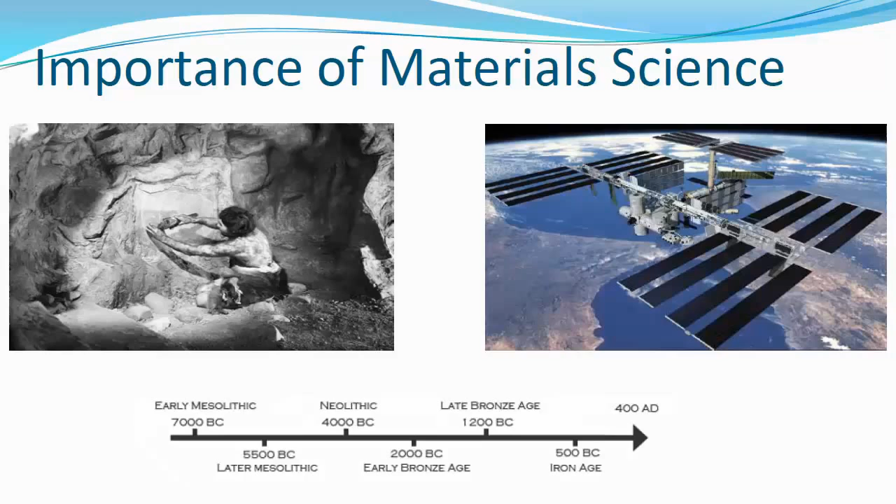Materials science is an immensely important human endeavor, so much so that the development of our civilization has been measured in terms of the mastery of our materials, from the Stone Age to the Bronze Age to the Iron Age. Our mastery of materials has brought forth the modern world, and innovations in materials often enable technological advances.

Such developments in materials affect us in many ways, and I think one of the most exciting ways is the way in which mastery of materials can enhance people's lives. And here we have an example of the use of various high technology materials such as metals and alloys, polymers, to produce a lifelike prosthetic arm.

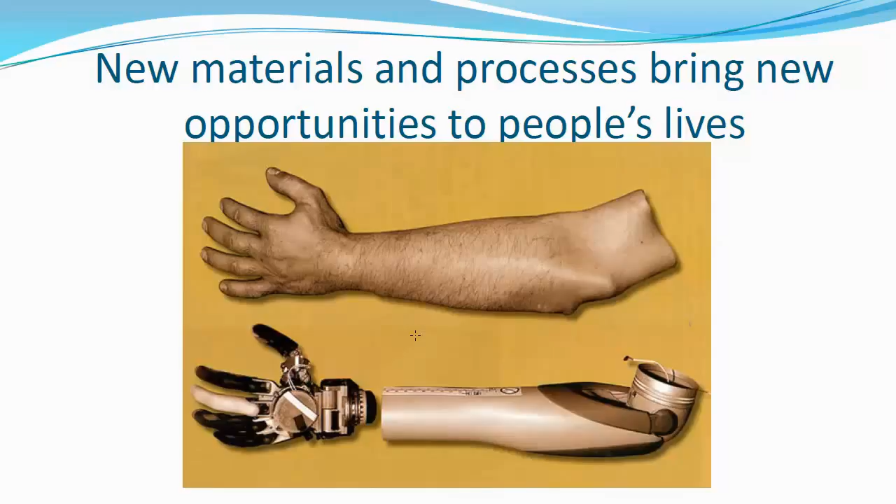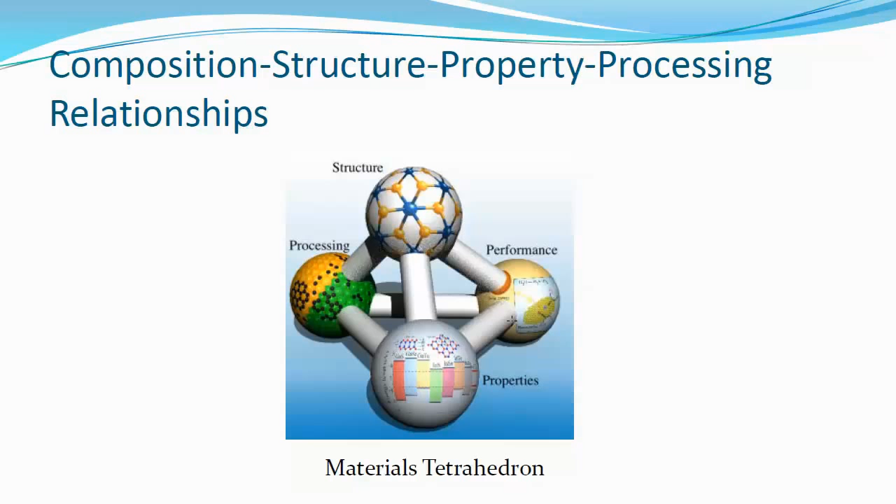A common theme in materials is the interplay between the composition of a material and its structure, how that relates to how it must be processed, which gives rise to particular properties which relates to the performance of the material in a particular application. And all these things are interrelated.

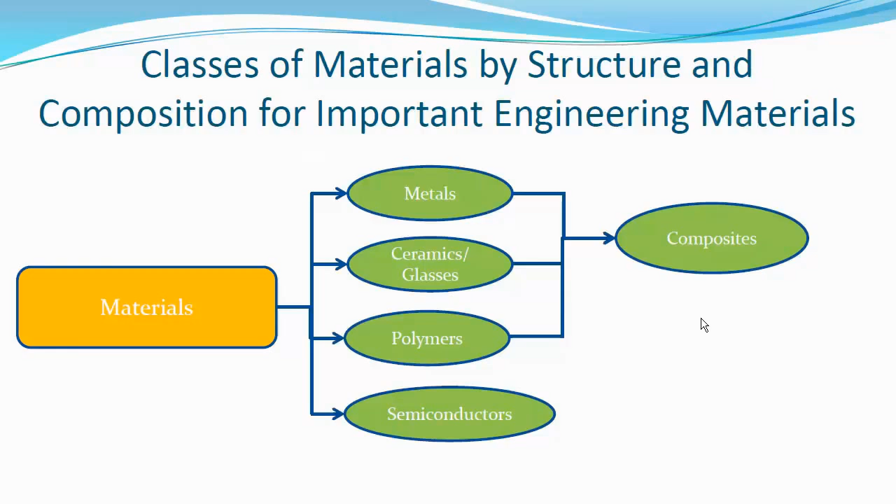Materials may be classified according to their composition and structure. If we do that, we can see that there are 5 important classes of materials. There are metals, ceramics and glasses, polymers, semiconductors, and if we combine some of the aforementioned groups, we can get composite materials. Let's have a look at each in some detail.

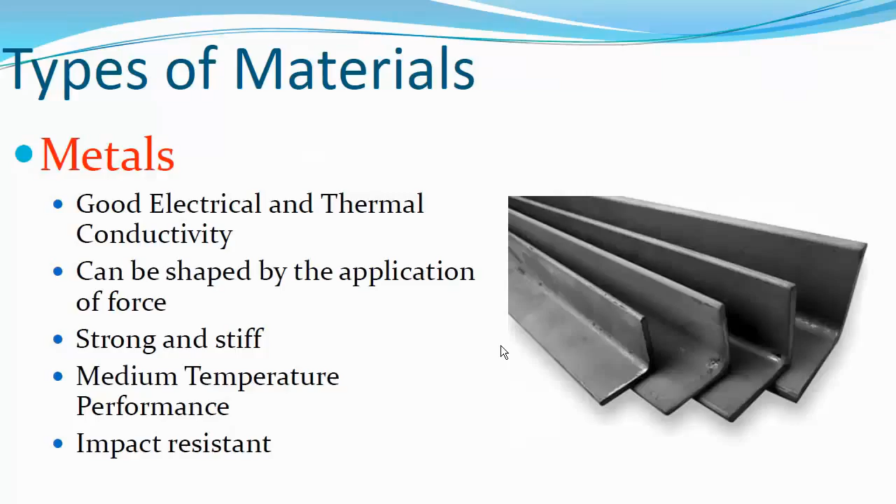Metals. Metals are characterized by good electrical and thermal conductivity. They can be shaped by the application of force. They are strong and stiff. They have medium temperature performance and are impact resistant.

Ceramics, glasses and glass ceramics are formed from inorganic compounds. Ceramics have a crystalline structure, whereas glasses have what is known as an amorphous structure, where the atoms are randomly orientated. Ceramics and glasses generally do not conduct electricity, and some of the best insulators are ceramic and glass materials. They are strong and hard,

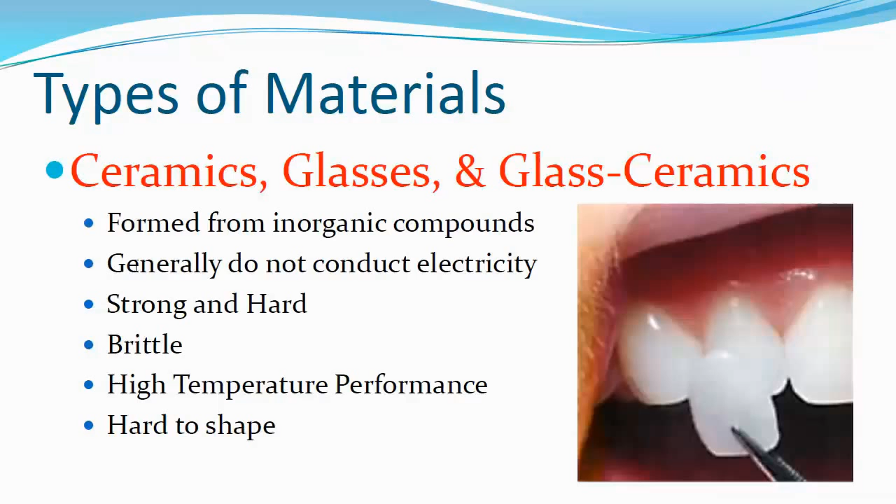but these properties also lead the ceramics and glasses to be brittle, which means that small cracks can grow and propagate and cause fracture of the material. They have a high temperature performance, but a downside to ceramics and glass is that they can be hard to shape into precise forms.

Polymers are formed from organic molecules, carbon-based molecules, that have been processed to form long, complex chains. They have low densities, but can have good strength-to-weight ratios. One thing that's not mentioned here is that a number of polymers are chemically inert and have excellent resistance to environmental stresses such as corrosion.

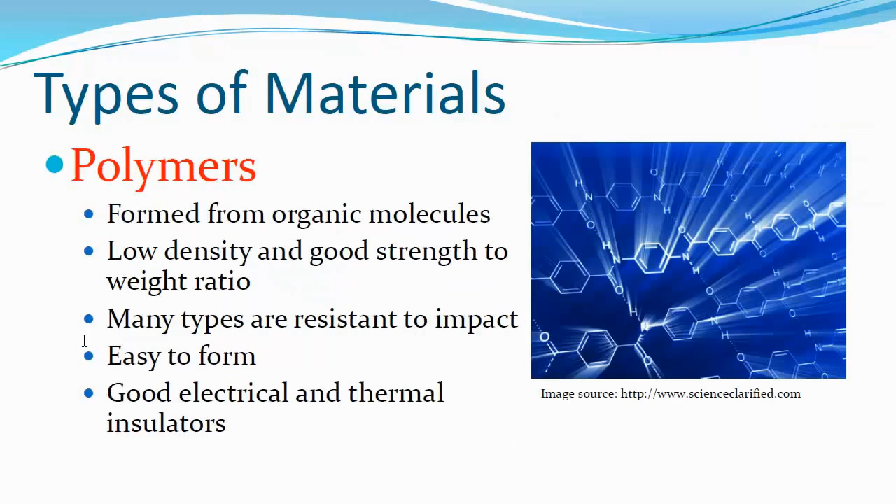Many types of polymers are resistant to impact, and polymers, often called plastics, are easy to form, the name plastic meaning to shape or form. And they are very good electrical and thermal insulators.

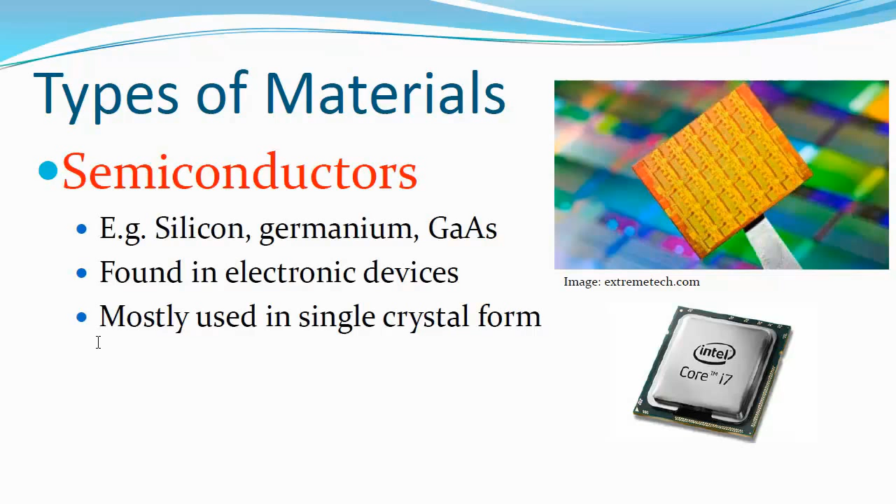Semiconductors are a special class of materials that are found in electronic devices. Examples of semiconductors are silicon, germanium, and gallium arsenide. They are mostly found used in single crystal form. The materials are produced to a high purity, but they are deliberately doped with small quantities of foreign atoms to give them the electronic properties that we desire. However, amorphous silicon is also an important material for solar panels.

Composites. With composites, we marry two types of materials from the metal, polymer, or ceramic glass group to create a material with superior performance. Some everyday examples of composites include concrete, and glass fiber reinforced composites are common parts of car bodies these days. Carbon fiber is used in very high-tech applications such as aerospace.

There are also carbon-carbon composites. Again, these are expensive high-tech applications. Carbon-carbon composites have been used to create high temperature resistance or high performance brake rotors.

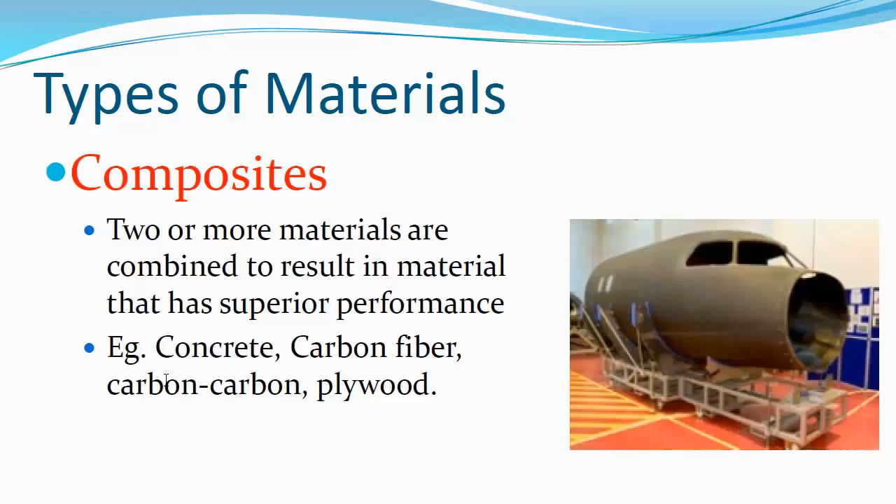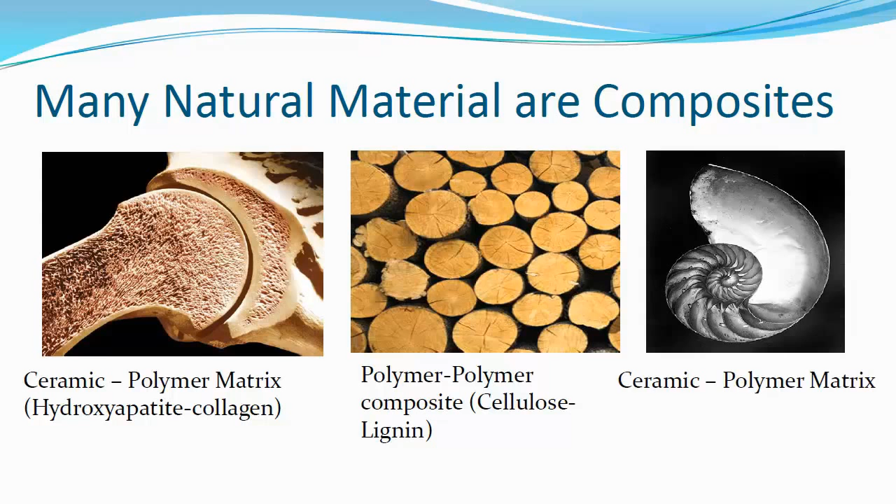Our bodies are composites. For instance, our bones are ceramic polymer composites, where the ceramic is hydroxyapatite and the polymer matrix is collagen. Wood is a polymer-polymer composite formed of strong, hard cellulose fibers embedded in lignin. And this nautilus shell is an example of a natural ceramic polymer composite. Again, hydroxyapatite being the ceramic.

Materials may also be classified according to their function. In this case, we can mix materials with different structures and compositions into the same group. For example, here we have the aerospace group. Some examples of materials that are in that group are carbon-carbon composites, silicon oxide, amorphous silicon, aluminum alloys, superalloys, which are iron-nickel alloys that can withstand high temperatures.

Examples of functional classifications include aerospace, biomedical, electronic materials, energy technology and environmental, magnetic materials, optical, smart materials. One example of a smart material is a material that can retain memory of a shape. So it can be formed in a particular shape. If it is deformed, the material can be processed, perhaps by heating, in such a way that it will regain its original shape. And of course, structural materials.

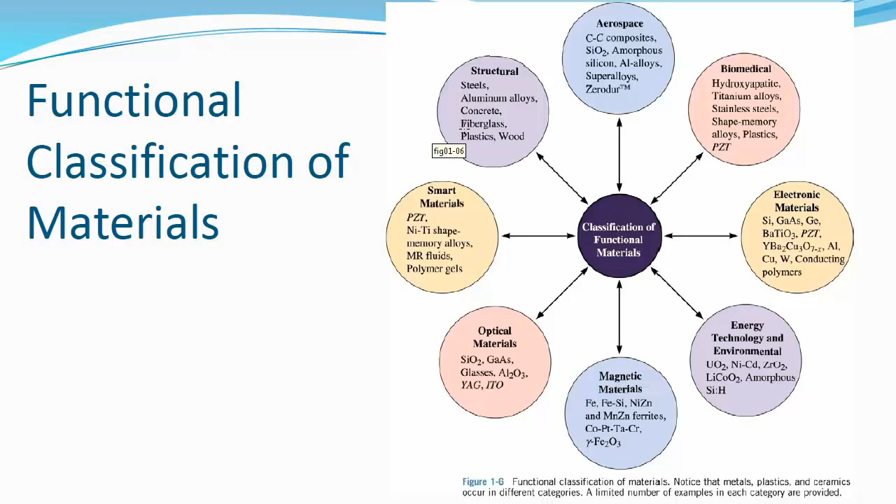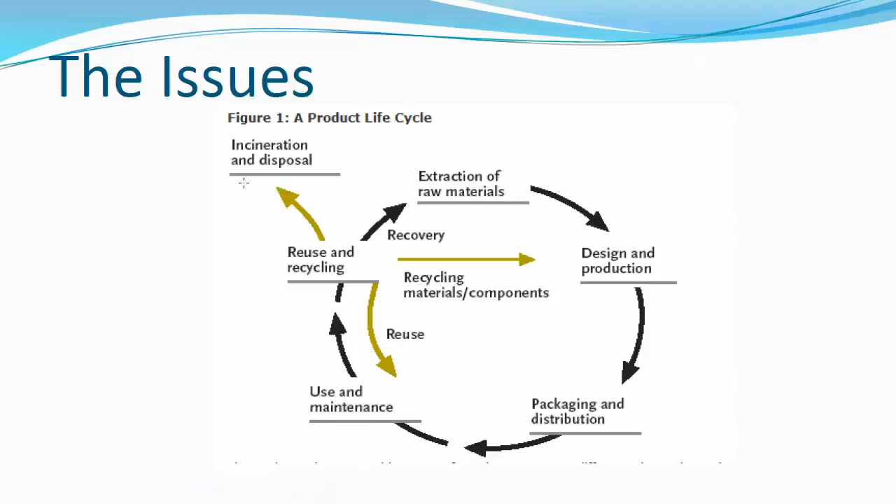So now we need to look at the materials that we use for a particular product to ensure that we can close the loop at the end of the life of the goods or the product, to ensure that either we can recover materials from the device that can go back into the cycle, or we can directly recycle components from the device, or put it back into reuse. The last resort is to dispose of the material in a landfill or incinerate it.

In response to these considerations, there have been some very interesting innovations. One of them is to use mushrooms as a substitute for the foam inside some vehicle components.